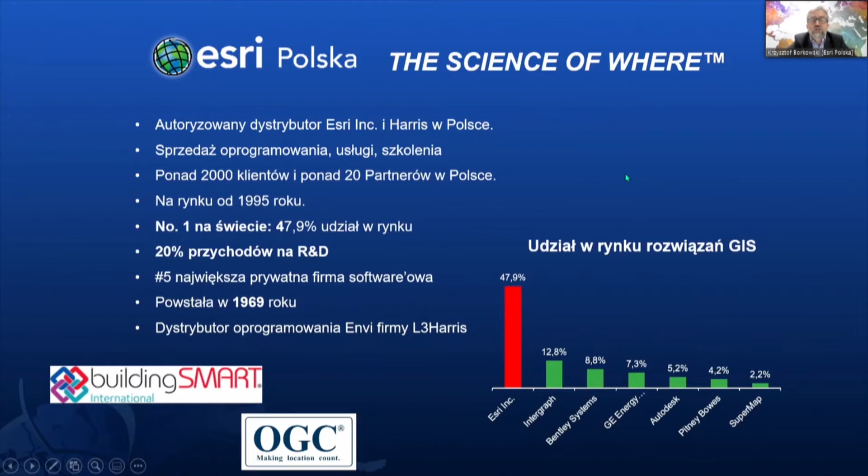Our software has also been used for creating Oscar-winning films. And we also purchased SiteScan, which deals with imaging from drones and creates 3D models from their imaging data.

Regarding the market situation, future customers who are related to some spatial aspects, like resources and data, if they work with us, they need tools to keep control of their processes.

So here are the main organizations working with us, and of course we cooperate with the transport industry. I believe 98% of large infrastructure companies are using solely, or to a significant degree, our software.

These are big customers, and we are present among many companies. There are a lot of GIS experts preparing spatial data and information as a sub-element of their processes using our tools.

Let me also tell you what is the origin of the fact that these companies have been using our software so extensively, and what kind of changes we have experienced.

The majority of our organizations, and also many of your organizations, are some kind of silo, where processes, departments or tasks are carried out as an element of some areas, and information exchange is small, with quite a lot of gates. At some point, you start considering which gate is best and where to find the best information. Many organizations have observed that the approach can be different.

So the question is, what would happen if we were able to break down all those barriers for the projects which generate negative value? They generate a lot of problems and extra costs downstream. So if we break the barriers and optimize the processes, concentrating on the true design problems...

This will allow us to create operational cooperation and information exchange among all stakeholders, including the customers. If all tasks are concentrated on something available in space, changing the silo operation model to a geocentric model, concentrating on the elements, definitely puts more order into processes, and information available in the organization becomes well structured.

So in the design industry, if spatial information is collected at the first stage, if we create some kind of full database originally, this will reveal a number of threats or situations which, if discovered at later stages, would require design changes and significantly increase the cost of projects.

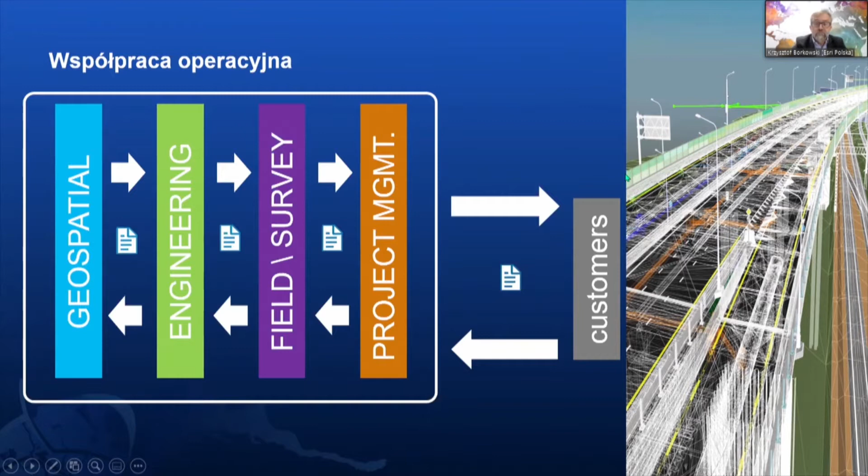So what is our perspective from the GIS and BIM point of view? Generally, we believe that GIS and BIM are strongly interrelated. These processes can exist independently, but they will never be complete if so, and risks will appear due to missing spatial information, as well as missing information in a broader spatial context, like more distant objects and facilities.

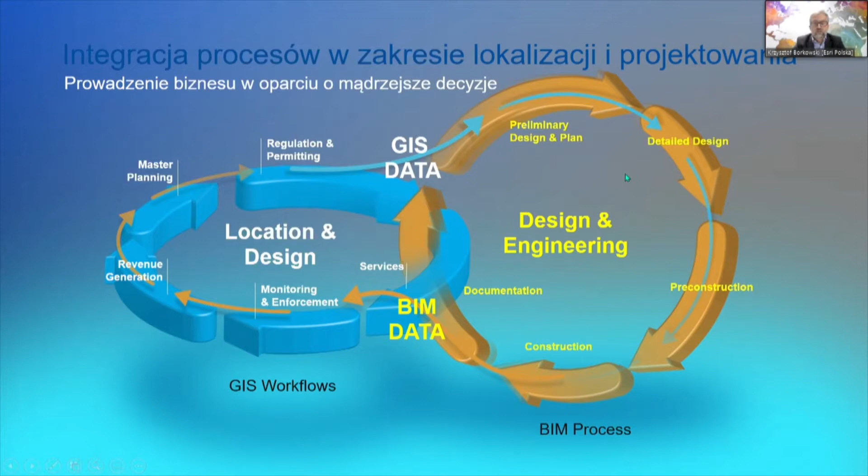So changing the project life cycle will allow us to understand the full data flow between design, construction, maintenance, and operation of infrastructure.

As an example of the first process, these are like permit and planning. Our system gathers and makes available BIM, CAD, MAC, PDF, Excel, surveys, and all types of data which are necessary and help design. Before the analysis, a lot of sources of information need to be gathered. So our tools, like for feasibility studies, will allow you to better understand the data, and this will allow you to carry out different analysis.

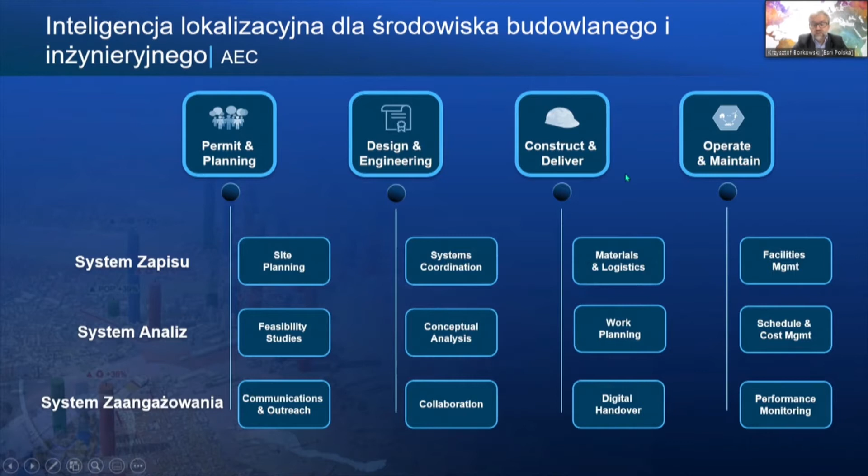And finally, with tools like StoryMap or in-field work or browser work, so the involvement, this will allow transfer of feedback in real time, collecting of feedback. This can also be used in social consultations, public consultations. So that's very important to separate all these areas where this process can be functional.

And looking at the basis, these three milestones, the system of record and the system of engagement, so this is a fundamental element of the system, puts all these elements together. In IT engineering, usually these are separate systems, but our assumption in our software is that it is a single system which generates a lot of synergy to achieve development of the organization.

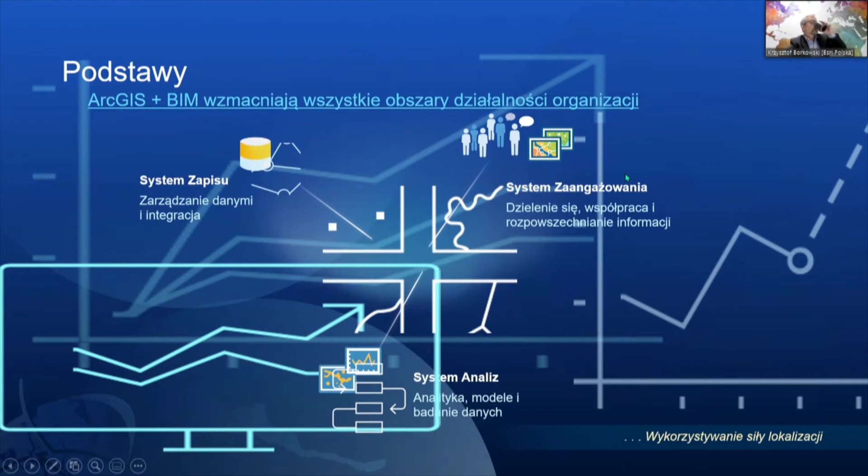So we can use different types of data. The software can organize and visualize all types of data, vector or raster, or literal sketches, calculation sheets. And we put all this data into one single system. So independently of what kind of data you have in our environment, this data can be used to work, and this is not very common.

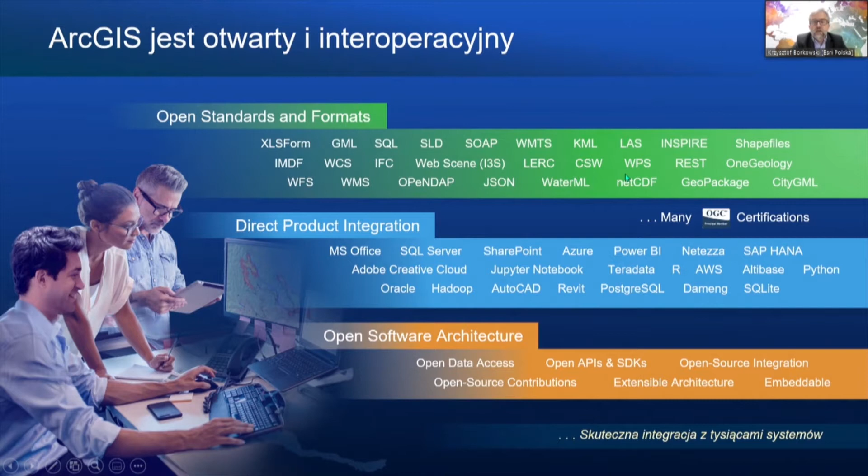Our system is open and integrational, so we support different formats and standards, and we have integration with other software used in business, like Microsoft, SAP, Adobe, API. But we also integrate significantly with Autodesk, and for almost 3 years we have had good cooperation.

And now we create Revit models on websites, and we can use Civil 3D to use spatial data. And also it generates trust of the users, and all the data you will have all the accuracy collection methods. All this information is available to be used and consumed directly in Autodesk software.

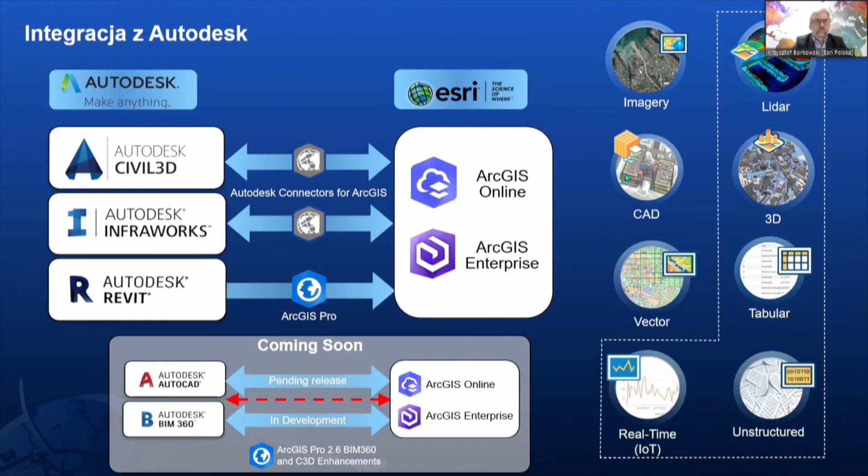And the solution in the market: I have 2 presentations on how the software operates in the UK, where Skanska, Strabag, and Costain carry out the High Speed 2 project, a high-speed train project in the UK. So I have 2 slides on what their perception is of the application of this approach.

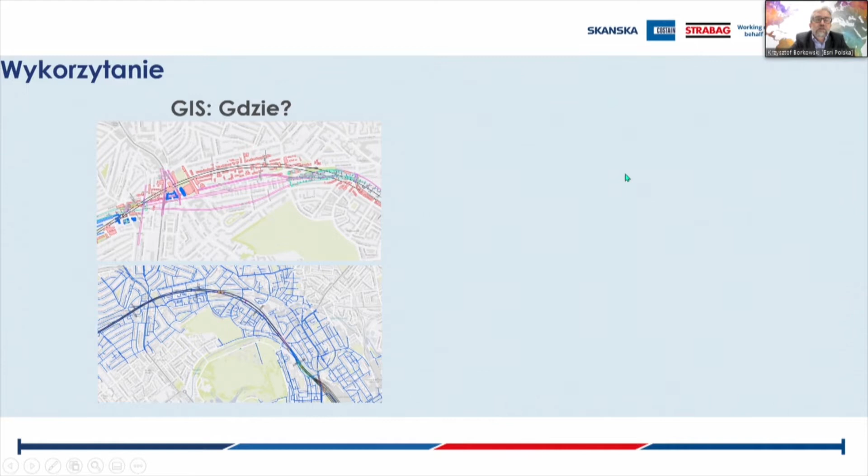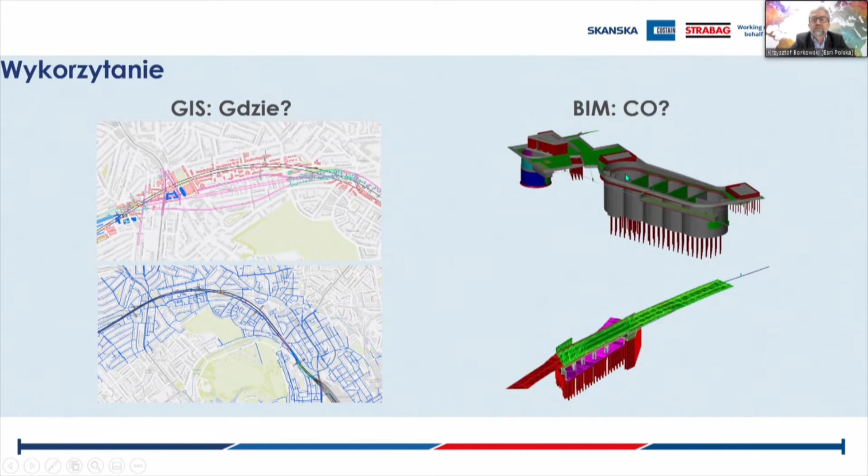First of all, it was clearly defined what spatial or CAD software needs to be used, and GIS is responsible for all information on collecting where, and BIM is responsible for all the information on what needs to be included in individual areas. Together, this is called GeoBIM - a combination of spatial information, which is supported by the structural information on the structures and how things are constructed.

And how was it summarized? The centralized GIS platform, integrated with BIM, totally changes their work. They can take smarter decisions, and it facilitates or speeds up schedules and decreases costs. And what is most important from the sustainable development standpoint, it helps build infrastructure which can last longer, also in terms of smart solutions.

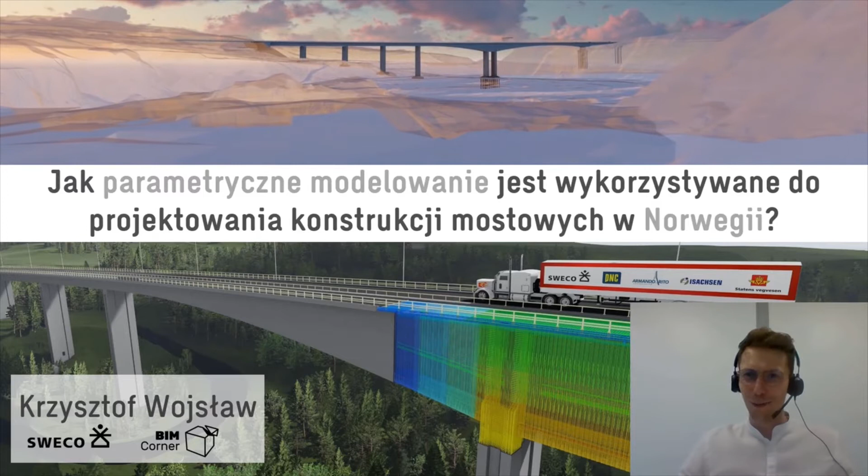Welcome. Good morning, ladies and gentlemen. I hope you can hear me well. The title of my presentation is How Parametrical Modeling is Used for Designing Bridge Structures in Norway. However, events from recent weeks made me change this title.

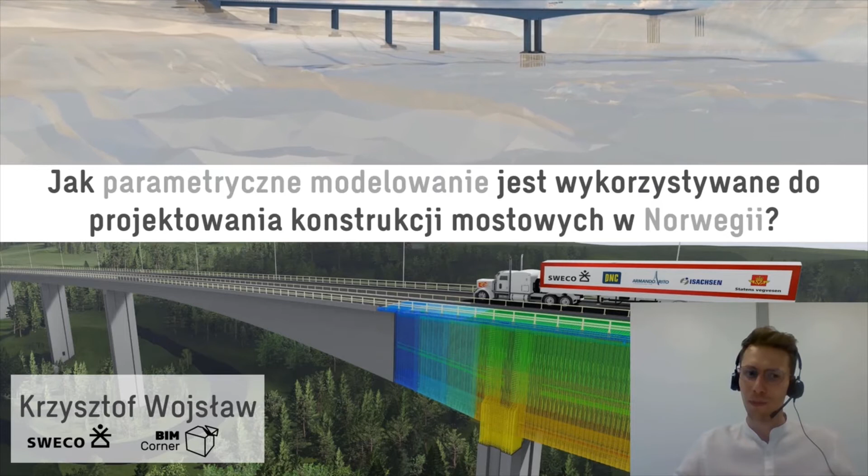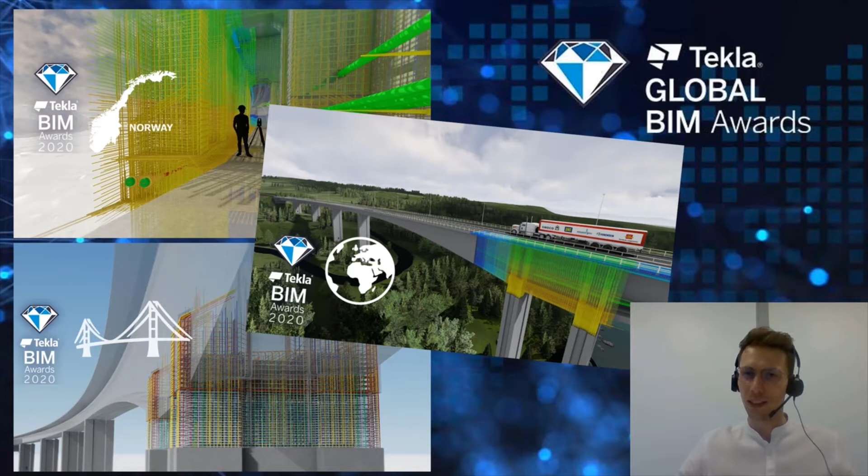It means how parametrical modeling leads to winning the prize for the best BIM project. The project I had the pleasure working on for the last 2 years won Tekla Global BIM Awards, a prestigious award, and not only one, but 3 awards: for the best BIM project in Norway, for the best infrastructural project worldwide, and the prize for the whole lot, the best BIM project worldwide, from among 130 projects filed from 30 countries.

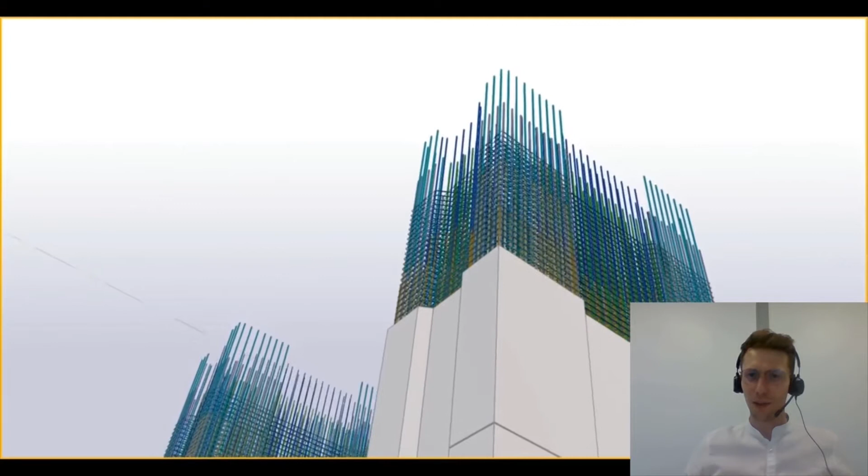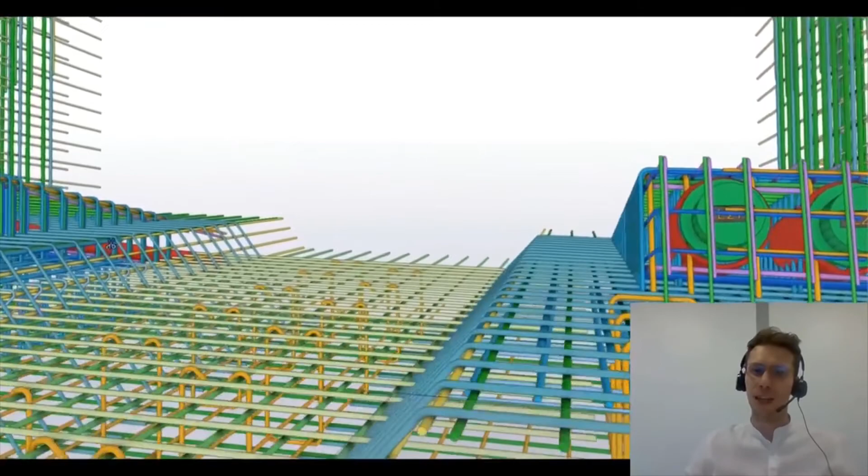And we are talking of this beautiful structure, Randselva Bridge. It's a bridge 634 meters long, and the longest span is 230 meters. Randselva Bridge is 100 kilometers from Oslo, and it will be built without drawings. Of course, for designing, sketches and drawings were made, but at site only the model was used, with literally a few detailed drawings of elements like a detail of drainage pit or a detail of membrane, which is very hard to be modeled, so it's much easier to present in the form of a drawing.

Contractor out of the model generates all material lists, tension cables, and trenches, all that comes from the model.

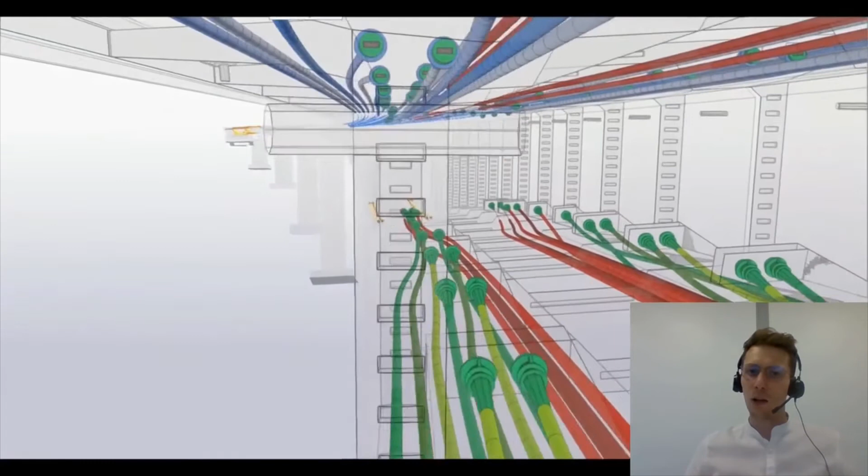In this case, it was a design and build contract, which is not an everyday practice in Norway. The main contractor is PNC, which in Poland you may know by the name Porr. The designers are Sweco from Norway and Armando Rito from Portugal.

Please look at how detailed the model is, modeled so as to avoid collisions, to facilitate work and control of collisions at site. The project is completed, and in spring 2022, the bridge is to be handed over for use.

A few words about me. I'm Krzysztof Wojsław. I come from a small but beautiful town of Olecko, in the Warmińsko-Mazurskie region. For 7 years, I have been living and working in Norway. I got my engineering diploma at Gdańsk University of Technology, specializing in bridges and tunnels. My master's thesis was written in Trondheim, Norway, together with the Norwegian General Directorate.

This year, I gained a virtual design and construction certificate at Stanford University in the US. For over 4 years, I've been at Sweco in Oslo as a bridge designer, and I mainly coordinate international projects and implement new methods of designing, such as parametrical modeling or the VDC method, which is a method of running multi-sectoral projects.

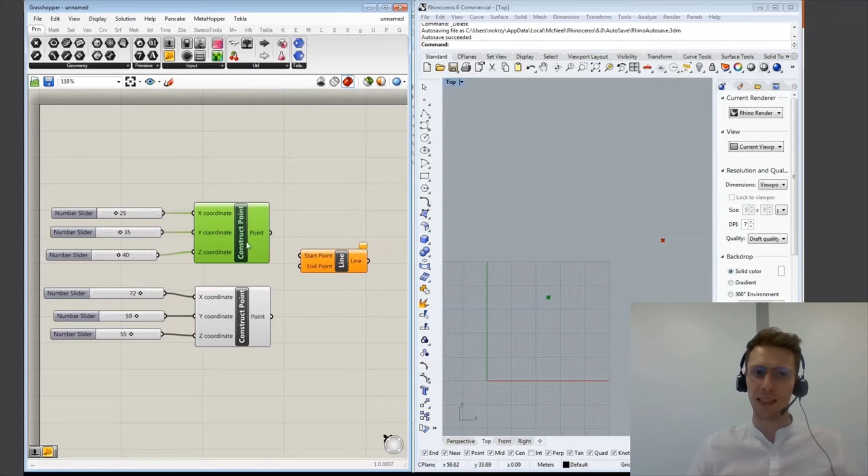When I say this, I mean thanks to creating scripts and algorithms. Let me show you how an ordinary line is created. On the left-hand side, we have software for writing scripts, which will create 2 points placed in space. These points have been connected with a line, and so we created a parametrical model of our line.

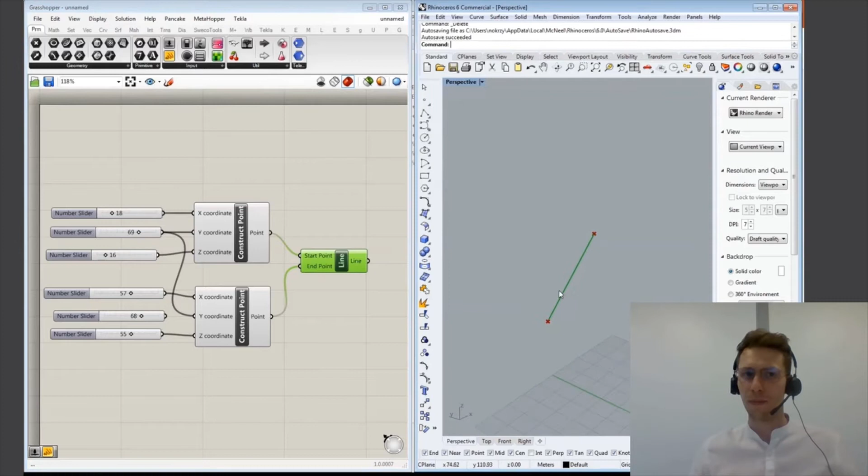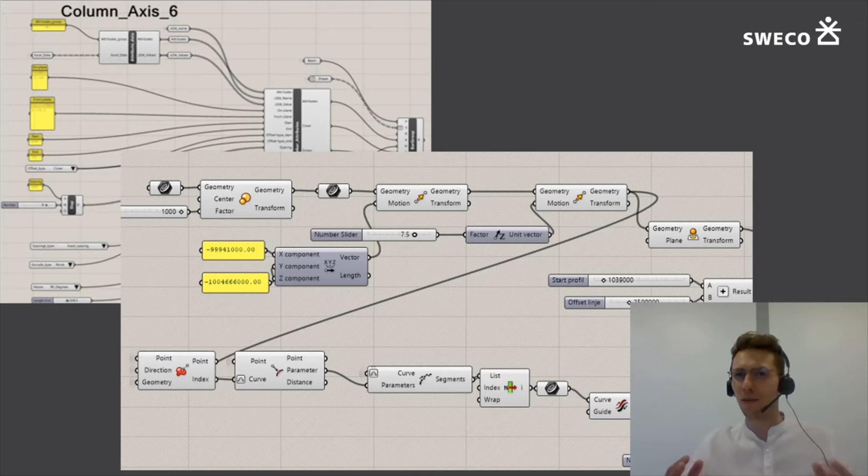The points need information regarding their position, that means their XYZ coordinates, and thus we can create a relationship between points and move this line. This line can be exported to a different program, a calculation program, or one for creating a model as a beam or a column. This way, further relations are created. So from one line, we can create relationships between other lines, other objects, and actually we can create our whole bridge unit.

Okay, that was the definition. So parametric modeling, summarizing, means creating scripts and algorithms which describe our geometry. Okay, and now why should we be using parametric modeling? What are the benefits of it?

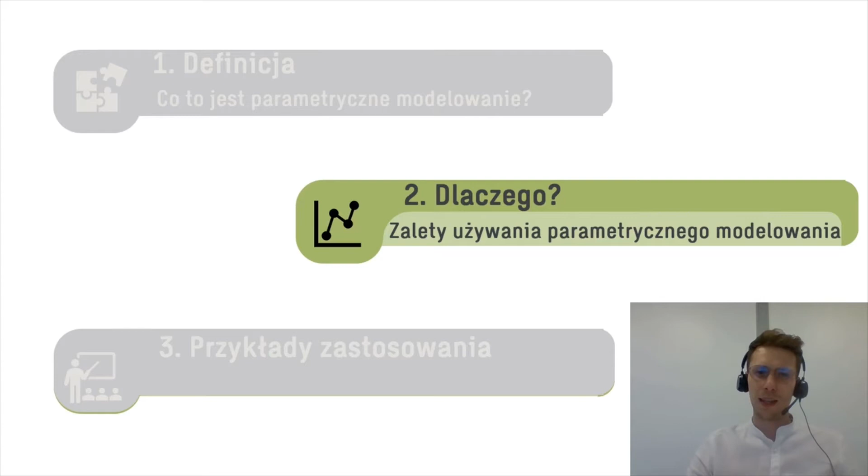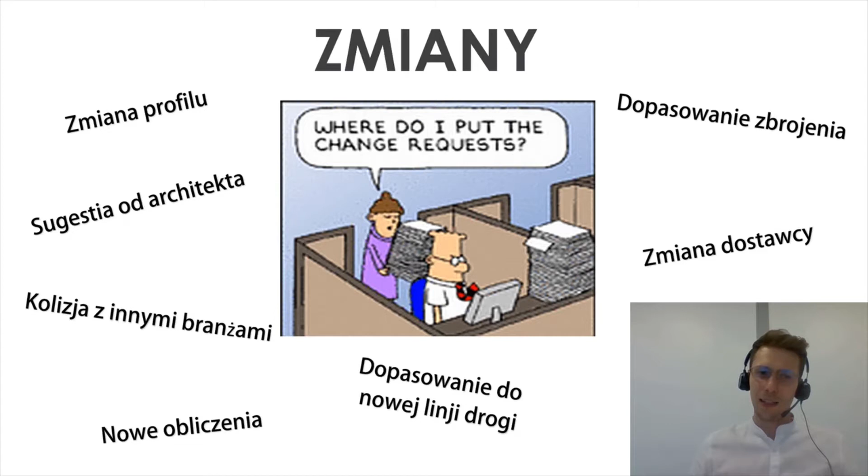One of the best benefits is the ease to adapt to changes. Here we can see a few standard changes for a designer, like adjusting reinforcement or suggestions of an architect which can really destroy our project. After 7 years working as a designer, I found one name describing them all: nightmare. It's a nightmare which can really destroy all our efforts put into the project.

So what should we do? I always advise here to listen to this gentleman. We should get ready, because changes will come anyway. But don't wait for the changes without any action from you.

If there is some risk that the road will change, let's put a lot of parameters into the geometry of the road so that each and every change can easily be adjusted and adapted. So we are looking for risky parameters which can be modified, and thus we create our parametric model, because it is not a masterpiece to create the whole model of a bridge where each and every element will be moving. We have to estimate what is actually the greatest risk and build our script and relations following that.

The next strong aspect of parametric modeling is the fact of merging it by idea with other programs. In this case, I actually work on two programs, Rhino and Grasshopper, which let me create scripts. But they can also be other programs like Revit, Dynamo, FEM, or generative components. It doesn't matter here. The whole idea is that our parametric model can be sent to calculation programs like Robot, SOFiSTiK, or RM Bridge, but also to programs creating geometry like Tekla, ArchiCAD, Revit, or NovaPoint.

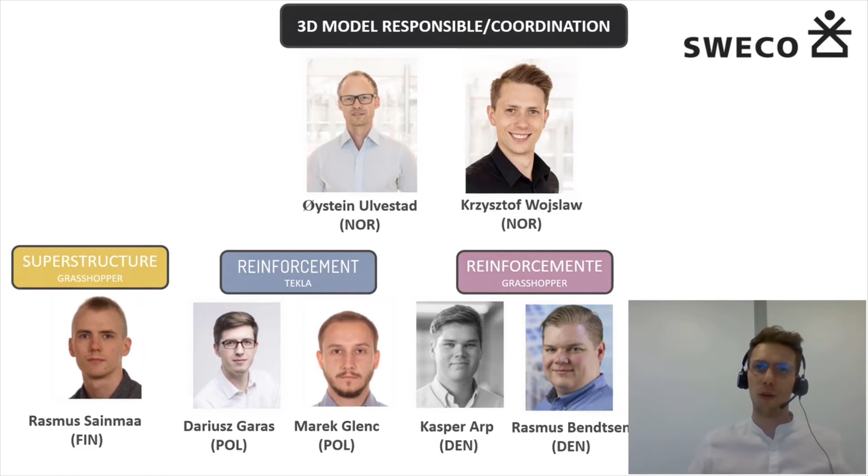The benefit of projects based only on a model is that in every country, a 3D model will look really similar. My experience shows that in cooperation on international projects, standards according to drawings look different in every country - it's different in Germany, Poland, Norway, or Finland. Here, creating a 3D model, it will be very much a standard one, and everybody working on the bridge does not have to know the standards to such an extent in creating drawings or models as it had been with drawings or cross-sections.

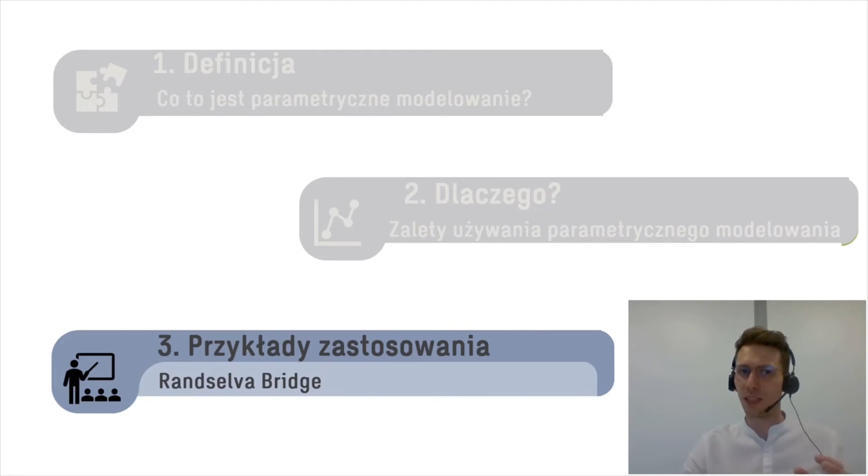So what we have discussed is the definition, what parametrical modeling is - writing our scripts, describing geometry. We have specified the benefits, why it is worthwhile: adaptation to changes, because we can be working with a variety of programs, and there is easier cooperation between or among other various offices. Now let's go to the examples to show you practical application of parametric modeling.

It was 4 years ago, and it was a two-span bridge, 40 meters long. But following the development of methodology and methods of designing, like parametric modeling, the goal - the largest bridge worldwide, built only on 3D modeling basis - has become ready for implementation. It appears that the crocodile is not so scary as it's presented. It's possible. Let's move on to examples.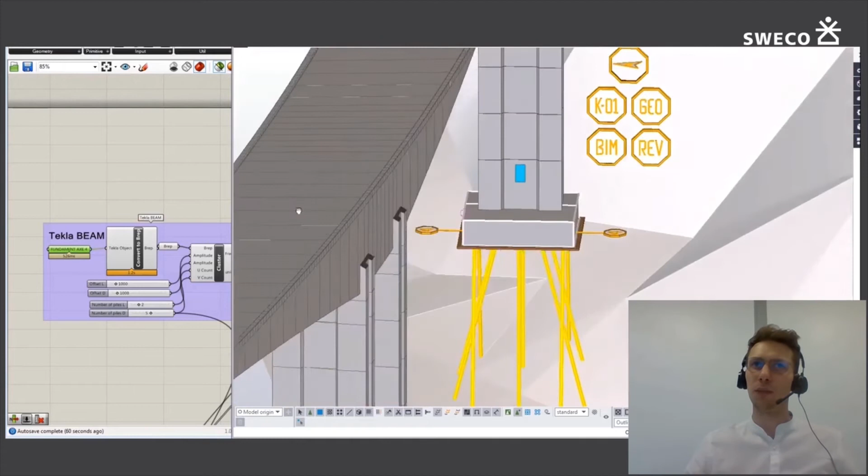Out of the parametric program, we select foundation for which the geometry of piling has to be created. On the monitor, we can see the gray surface depicting the surface of the rock. Using sliders, we can easily define the number of piles in the given foundation and the span between and among them. We can also see that the length of each pile will be adjusted to the surface of the rock.

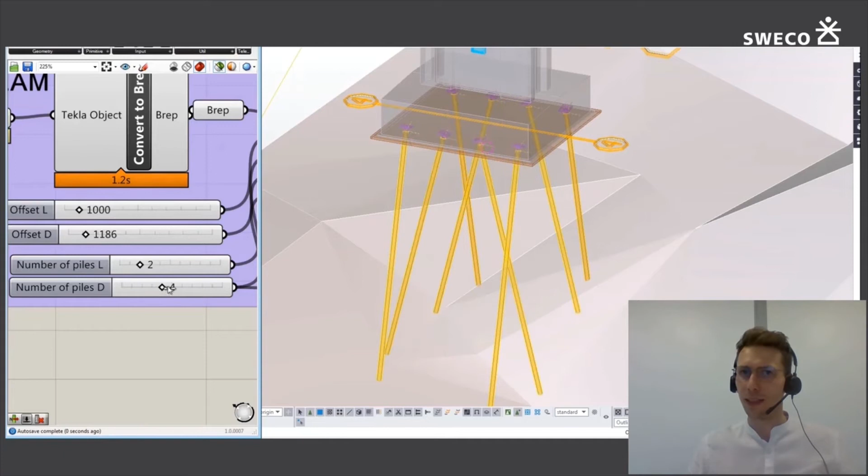Thus, we can quite easily estimate, together with the contractor, the cost of the investment project and see how the costs are changing. If we click on a given pile, we can check precise information on the length of the pile, and when we change it, it will be updated.

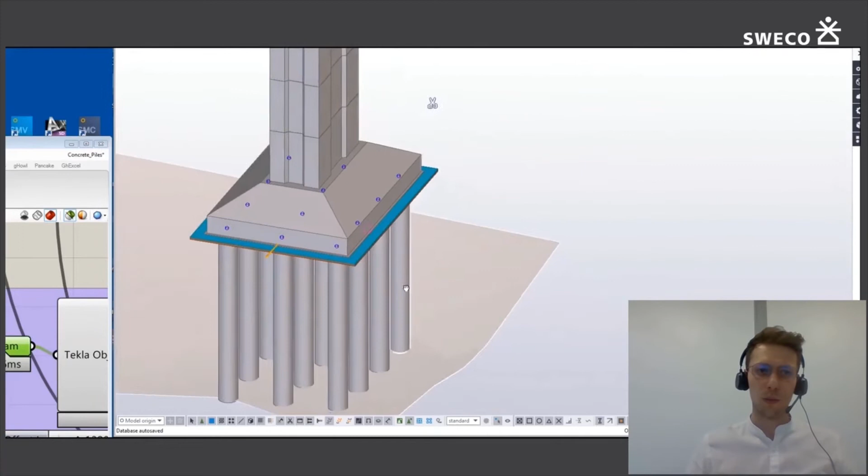The next example depicts the same rule, but for creation of concrete piling. And in this way, we standardized our system of work. Each and every time we create our model, we can quite easily introduce our parameters: the number of concrete piles, and the span distance among them.

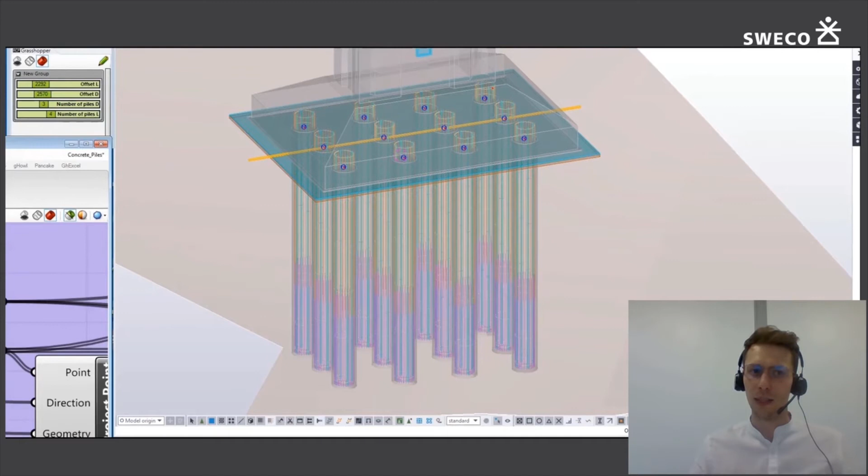Additionally, following the concrete piles, we went further in designing our reinforcement so that it will be created following every modification. So if we change the number of piles in this foundation, we'll see that the reinforcement is generated anew. We are changing the number, and automatically the reinforcement is generated using some options. We can also modify the length of the rebar, the anchoring, or the cross-section of rebars. So this was the first example.

The next example will be creating a box reinforcement in the whole part of the support. Believe it or not, only one person was responsible for modeling the reinforcement in the support part of the bridge, which, let me remind you, has a span of 200 meters. Only one person was modeling this reinforcement. Now let me show you how it was possible.

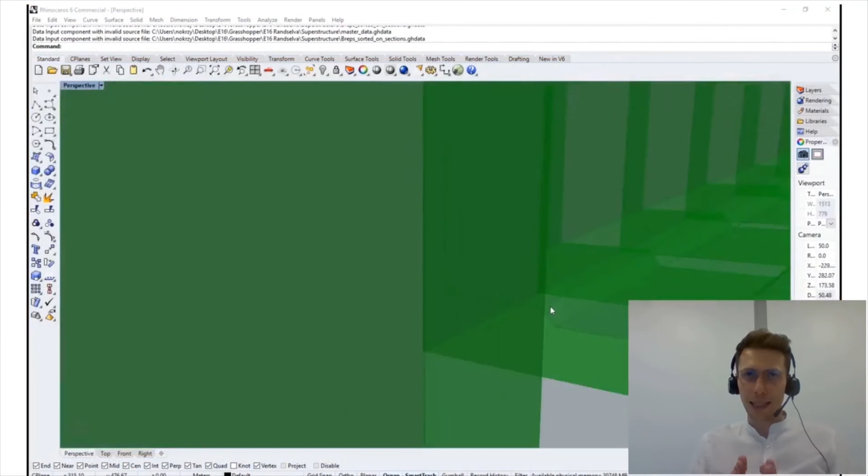Here we can see our support parts, elements which are mirror reflections, so on the left and right-hand side, elements will be identical. The rule is that we had to find our lines and points on our bottom box, and in this case, we want to find the picture of the stirrup.

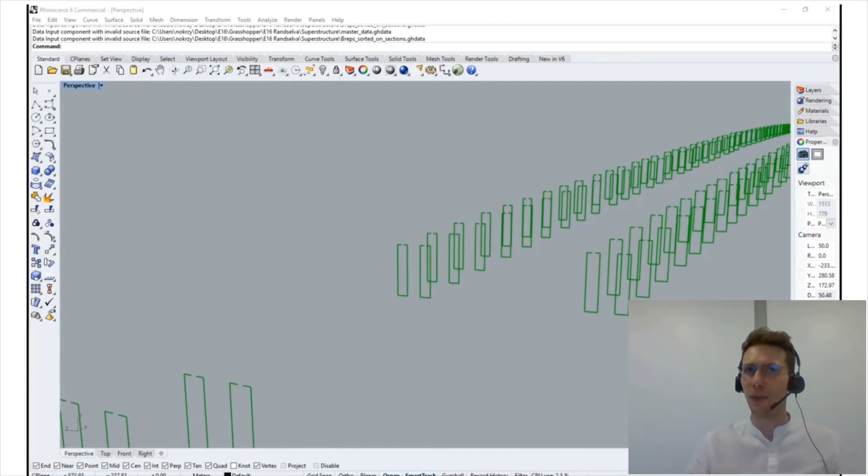Every stirrup in the box will be different because the thickness of our lower board is defined by two parabolas. So the height of our stirrups will be changing, but the software can find the appropriate lengths by itself and connect the reinforcement into one element so that it will be easier to order at the site.

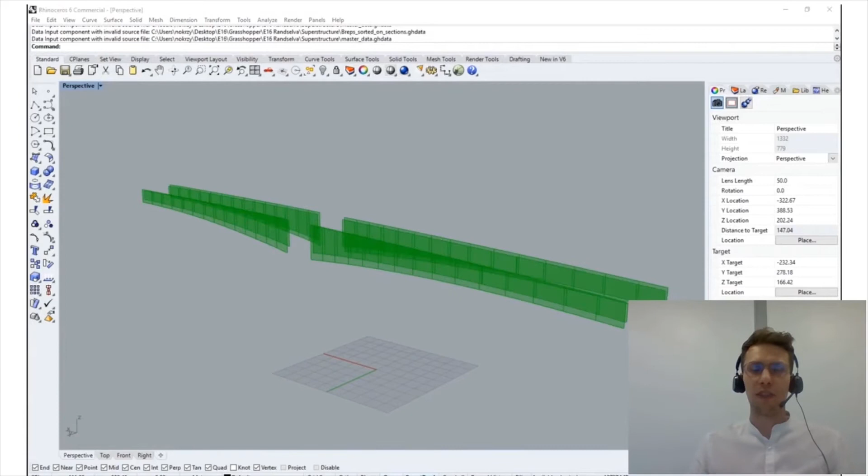So let's see the solution to this problem looking at a different example. Here we are looking for auxiliary reinforcement in the walls. Identically, we find our walls and appropriate points at appropriate heights, and the software creates the stirrups by itself, which will be in the appropriate quality, in the appropriate element.

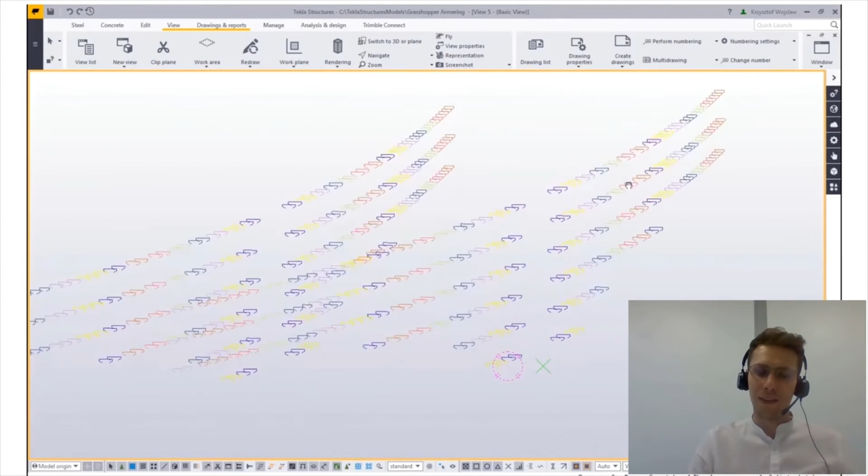Every box will be different, and thus on the right-hand side we have 25 boxes, and on the left-hand side 25 as well. This is how our reinforcement is created. So, this is showing how we created the majority of reinforcement on the bridge.

Now let's go to tension cables and electrical cables. Tension cables were calculated in RM Bridge, and using a script we could export them to our model. In this case, we had assurance that what had been calculated is also present in the model.

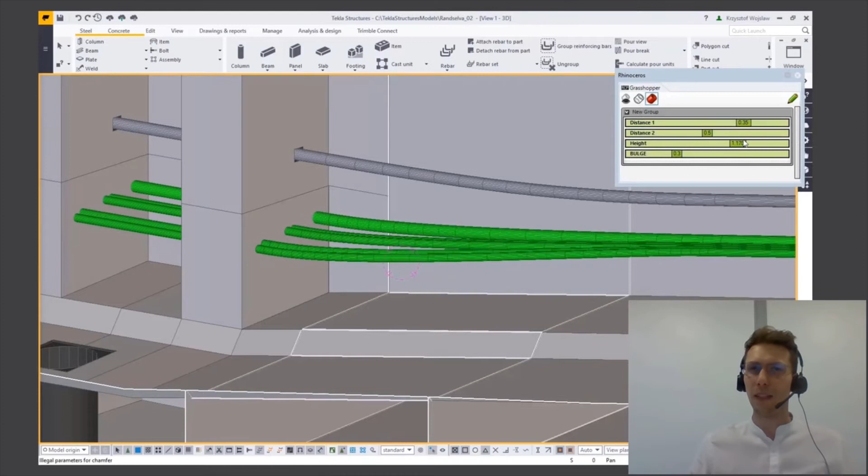In the software, we can define the distance between our cables and also the height at which they run. In this case, these are electrical pipes going all through the length of the bridge and must be adapted to our parabola. We can easily change the span between cables in order to adjust their position in relation to reinforcement. And so our geometry of cables had been fitted to the whole parabola.

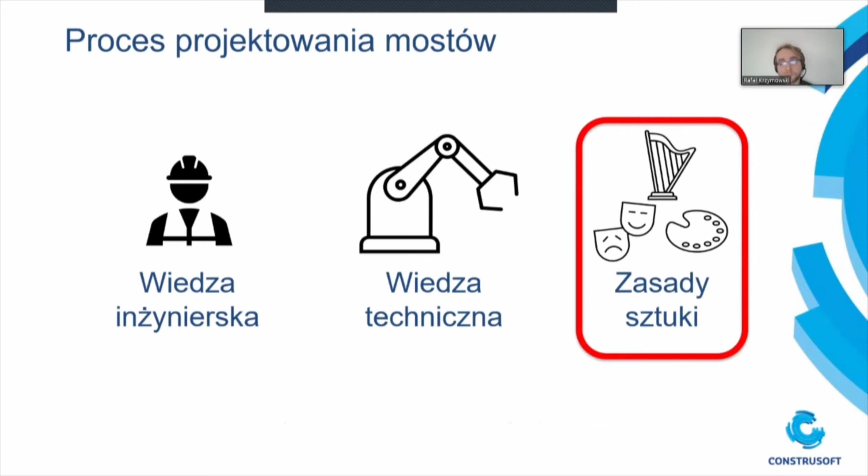Moving on to the subject matter, we all know that many people participate in designing bridges, representing various sectors: designers, process engineers, as well as architects, who play an increasingly important role. The designing process itself should be based on engineering knowledge, technical knowledge, and the rules of art. Regarding knowledge from that last field, this leads us to the term of aesthetics in the bridge designing process.

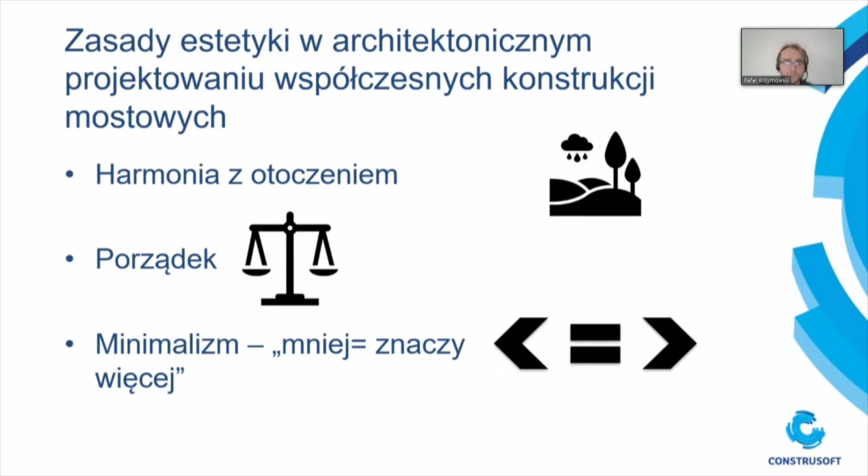Regarding basic rules which one should treat as guidelines: first, harmony with environment, meaning the designed units should play together with the landscape around them. Then, order - you should aim at keeping order in elements and taking care of cohesion of elements, and also balance between rational elements and architectural expression. As well as minimalism - minimum variety of forms should be a guideline.

You can draw conclusions from this, taking into account all three rules specified. Designers should aim at obtaining unique forms of structure which will give the objects a specific, unique character. One should also aim at maintaining slimness of structure and avoiding the impression of heaviness.

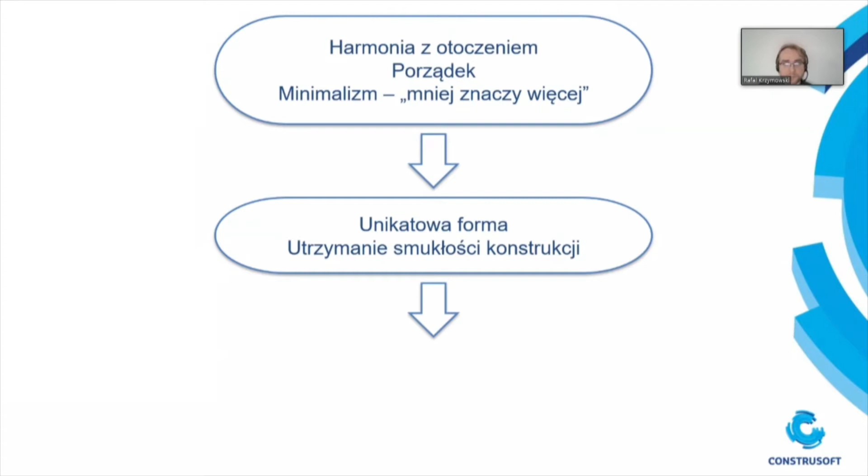This often leads to applying unconventional, irregular shapes, meaning complex geometry of the unit, whereas modeling or creating such objects is quite difficult. It generates a whole range of challenges and problems, among these: a curved axis of a bridge, variable cross-section along its length, longitudinal decline, variable decline in cross-section, and also variable support or modeling construction lifting.

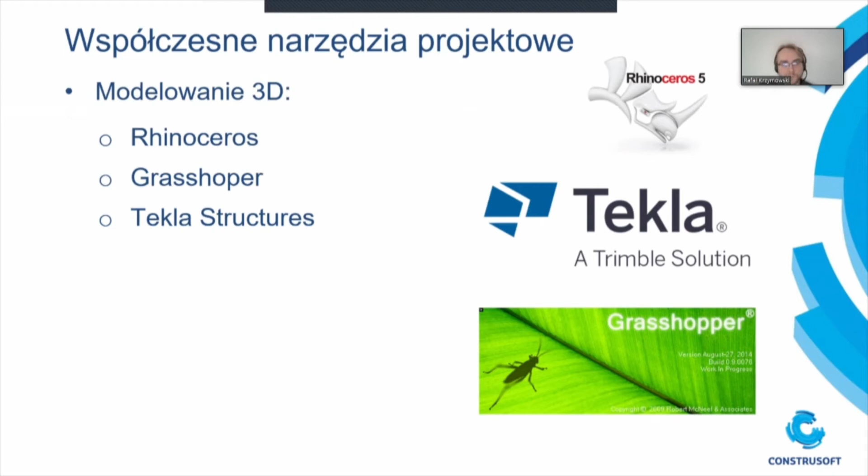Fortunately, following the development of technology and computer techniques, more and more advanced tools are available now. My predecessor talked partly about 3D modeling. We have examples like Rhinoceros, Grasshopper, and Tekla Structures - programs which can cooperate. What I would like to tell you about also includes laser scanning; an example here may be Trimble RealWorks.

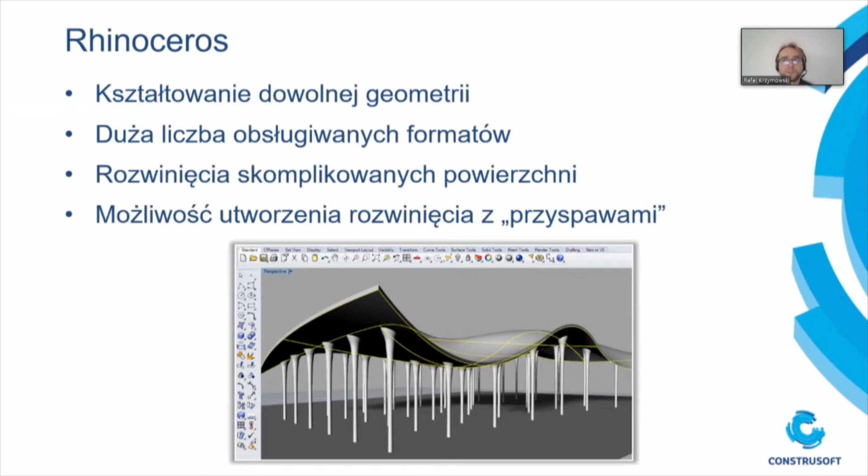Rhinoceros is software for modeling. Here we can practically model any shapes regarding any geometry, and the benefit is also the great number of formats supported, which allows exchange of data with numerous other types of software or solutions available in the market. Grasshopper, on the other hand, is a graphic programming language which can also be used for parametric design, and it is an environment which works with the use of Rhinoceros 3D.

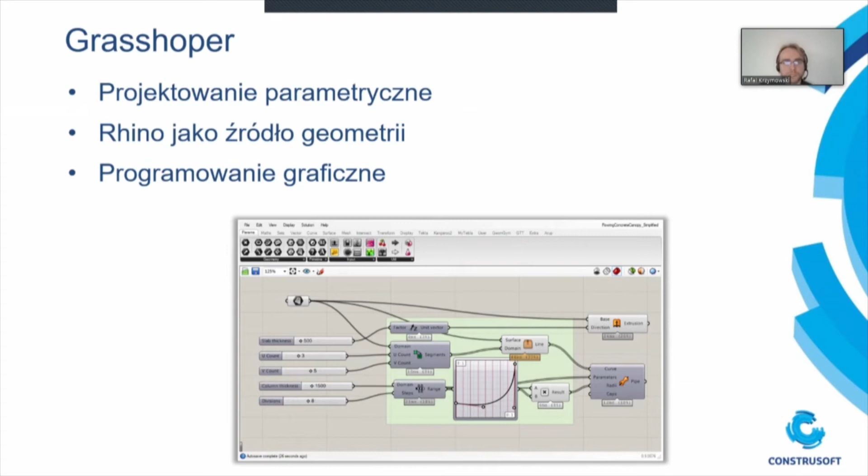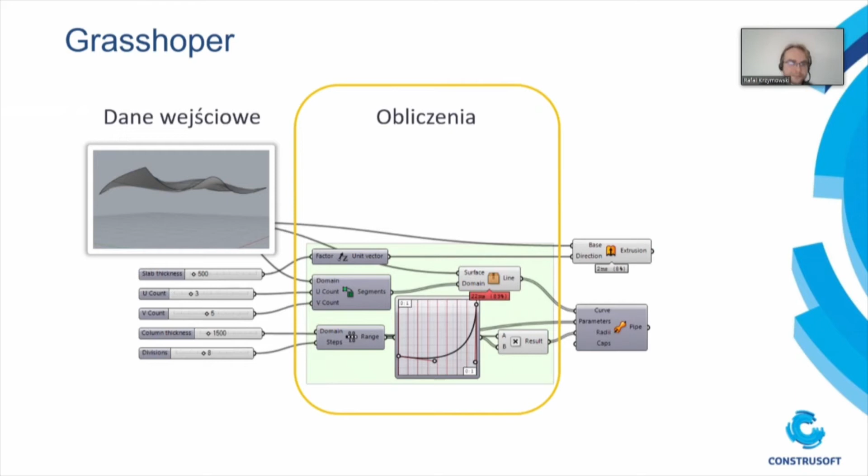This graphic software, briefly, works on the basis that we take a component into the sheet, and then these components are connected to the inlets of further components, and thus we obtain, for example, a complex geometry. Here, roughly, a situation like this: we have input data regarding, for example, thickness of elements, the curve itself, what the span is, and then we connect it with some algorithms. Calculation follows, and as a result we obtain a model with complex geometry.

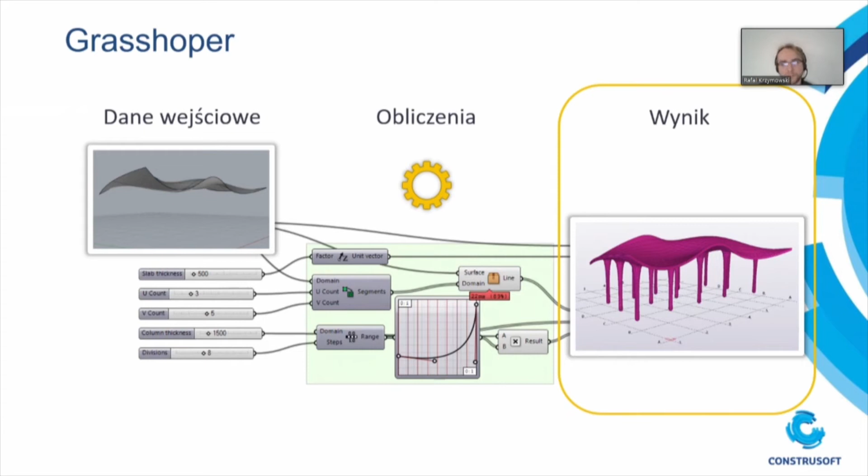This may also be used for generating a variety of elements or for connection to other programs. Benefits of Grasshopper: we can create our own parameterized sheets for typical structures, and we can optimize designing time for typical elements. This can also be used for creating or modeling complex spatial structures.

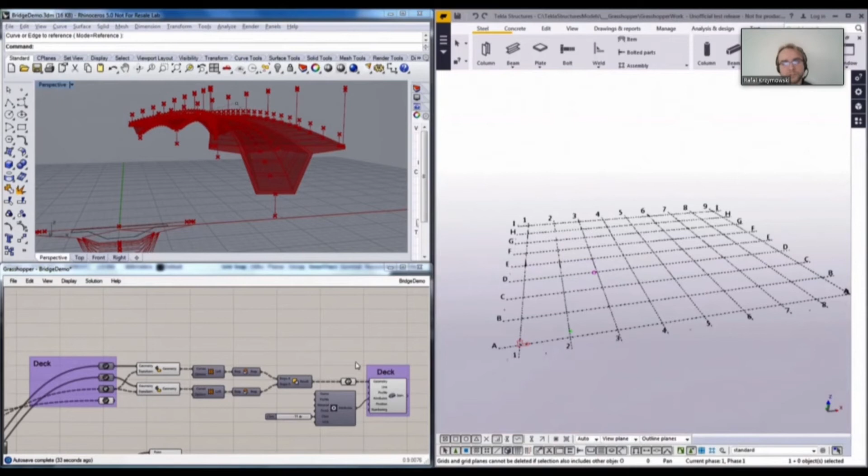It also allows modeling or creating similar elements simultaneously. Here, very briefly, what it looks like - a brief animation. We have three programs: Rhino, Grasshopper applications, and in Rhino we have various cross-sections defined, a defined path or line of this unit, and by connecting and merging this data, we can transfer such design to Tekla Structures.

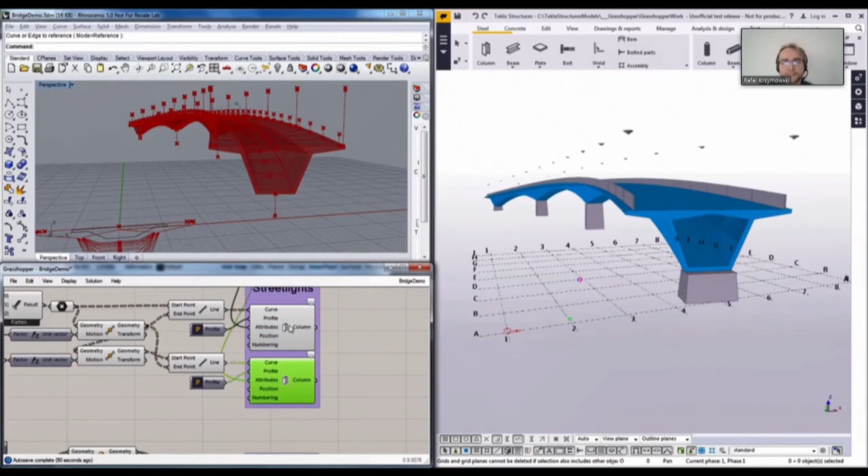The result here will be this kind of geometry in line with parameters specified in Grasshopper. The next film can show you, like in the first one, that you can actually attach it to modeling linear elements, but also more point-type elements or supporting elements, columns or barriers, elements of lighting - the whole range of various applications can be found here.

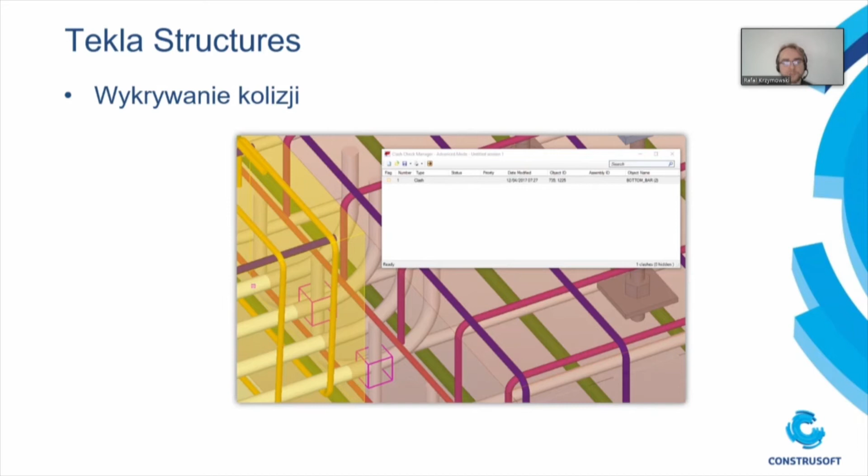Tekla Structures software is an engineering program used not only for design. It is used for designing structure, but as a tool for engineers. It is not only for modeling elements, but it also has a whole series of functionalities allowing you to manage documentation or control the unit.

Here you can detect collision, or check whether certain elements are not in collision, because the model is connected to documentation. We have drawings always up to date, and in the drawings you can automatically generate individual elements, and it also enables you to trace changes as well as quickly respond to those changes.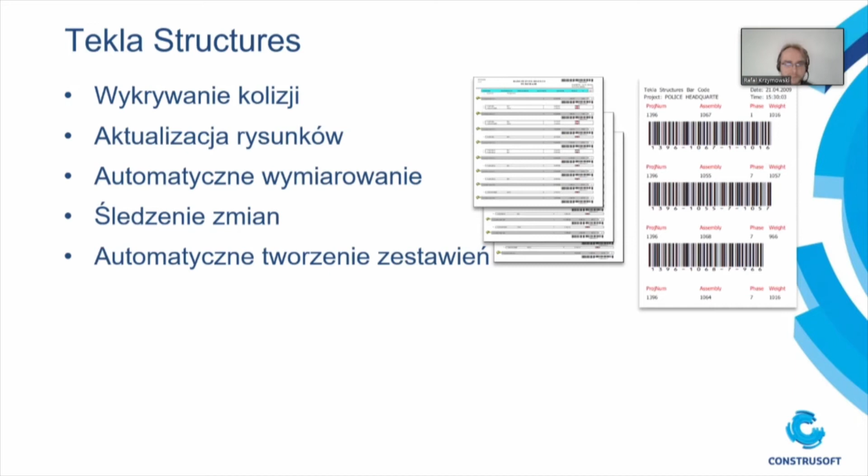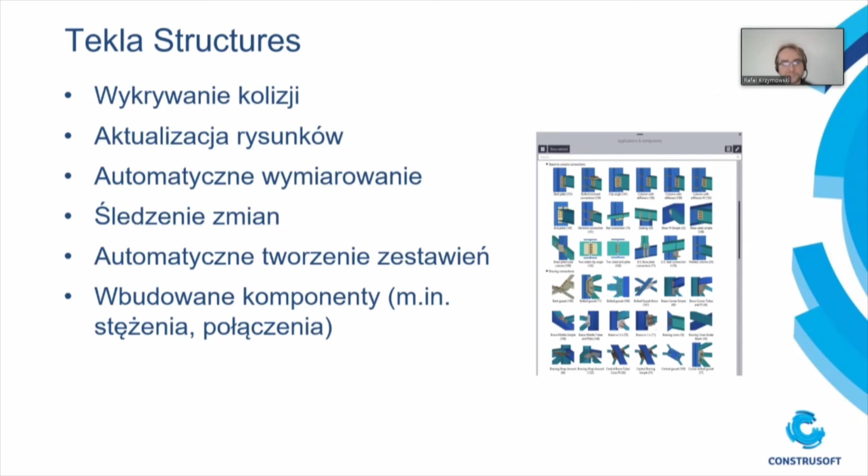Out of the program, we can also obtain a variety of reports, so we can do pre-measurement based on the existing model, whereas the whole series of documents, macro documents, allows you to faster design the structure or introduce reinforcement. Or there is a possibility to connect to production.

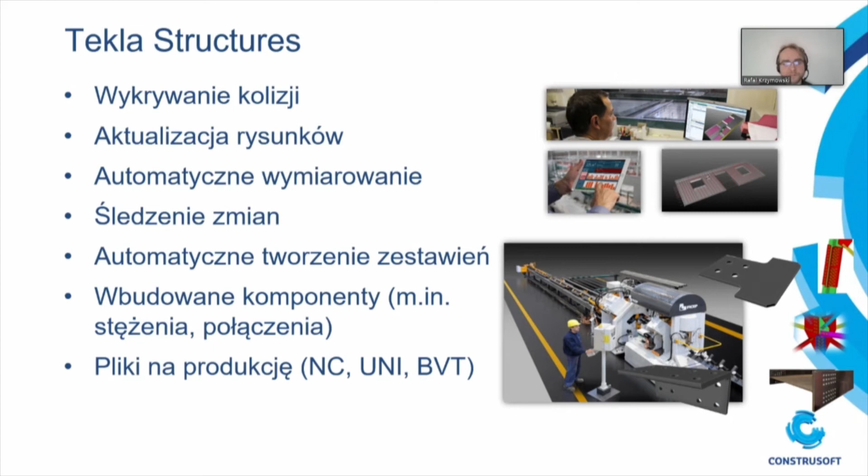You can send NC files to the shop floor, also Unitechnic files in case of reinforced concrete elements, or information related only to the reinforcement itself. Added value here.

Some of our customers may actually stick out in the market, providing additional value and a marketing element. Tekla Structures, on the occasion of more complex elements of structure, is a tool for supporting and facilitating construction of elements.

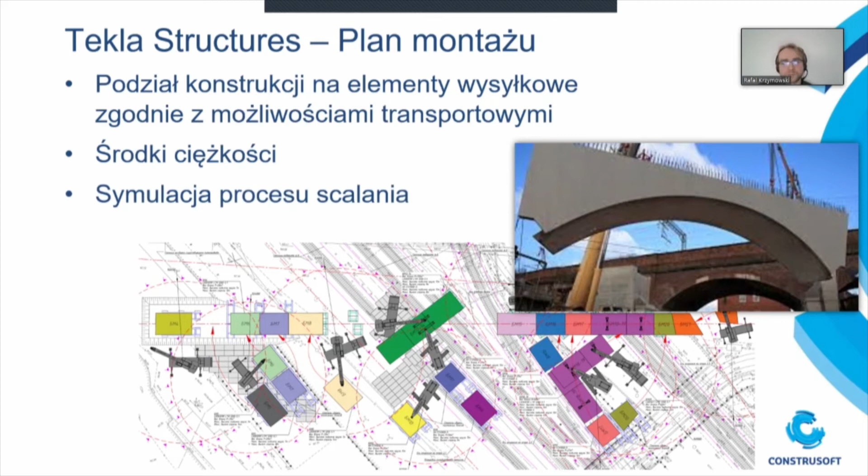We can divide the structure into transport elements and coordinate it with transport possibilities or at the shop floor, and we can also simulate the process of putting the structure together.

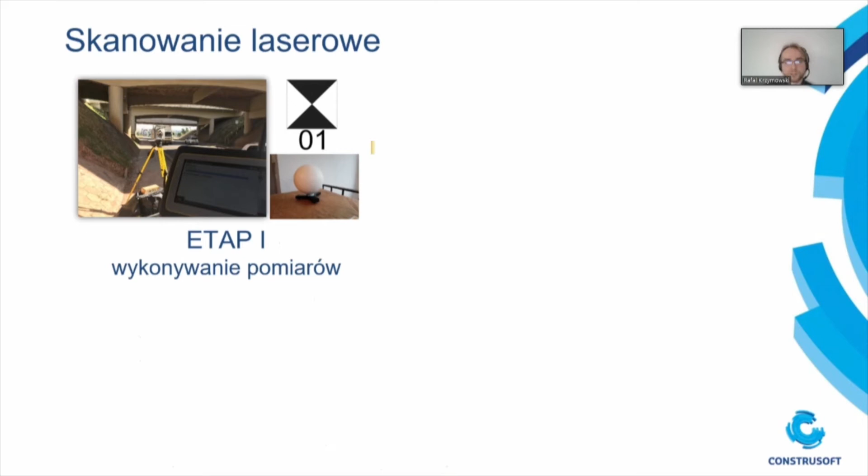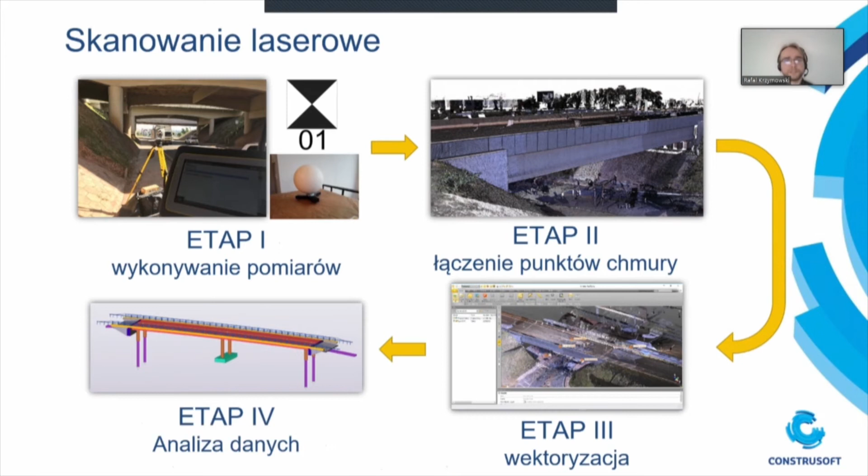Yet another possibility to use these new tools is laser scanning. Let me briefly say it comprises 4 stages. First, we take measurements with the use of special shields or balls, and then everything is connected into a cloud of points. Then vectorization follows, and the 4th stage is elaboration and analysis of data.

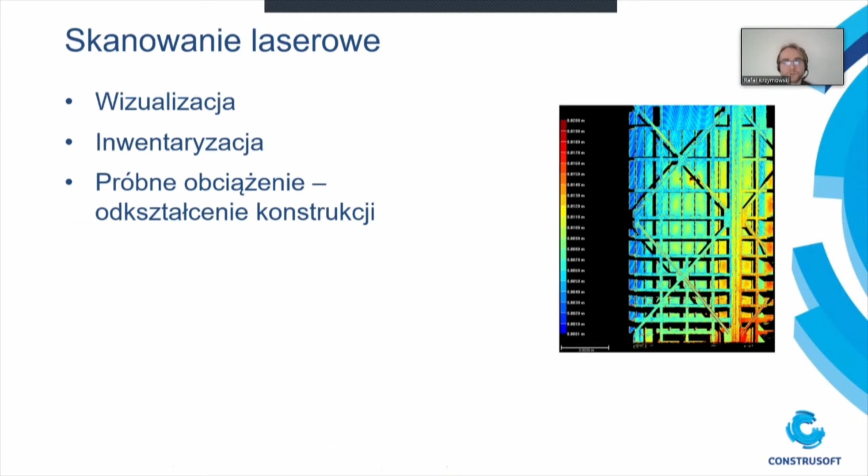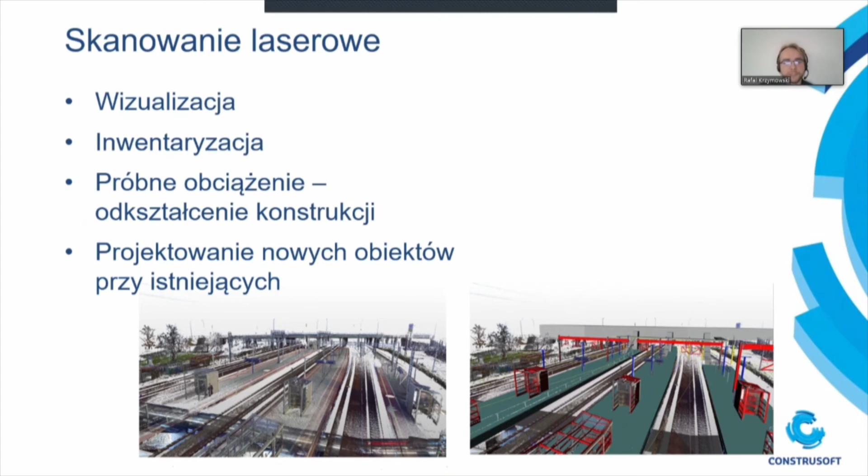Laser scanning can be successfully used, among others, for visualization of elements, inventory of existing bridge units and objects, and also test loading of the structure for tracing or carefully checking the deformations which the structure would have. Also, in designing, you can use it successfully when designing new objects alongside existing ones, using the cloud of points on the existing units to design or intertwine this element precisely. And of course, creating land maps.

An example of application for all these tools is a pedestrian bridge over the Gizycki canal. It was designed in 3D BIM technology, and apart from 3D designing, laser scanning was used in order to measure the displacement in load tests.

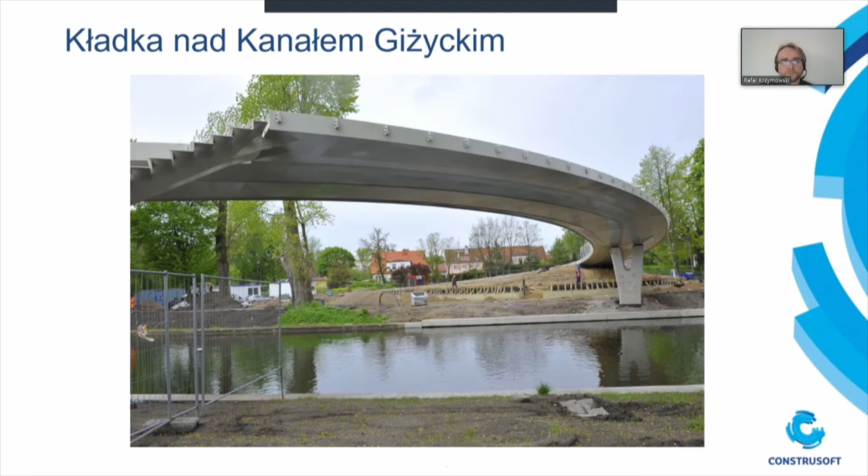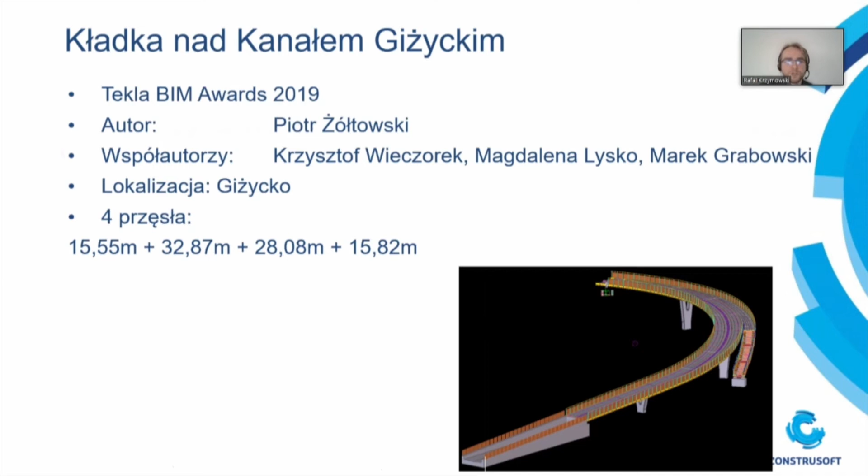It was made by a team led by Piotr Żółtowski. It is located in Giżycko, whereas the challenge was to design a bridge both for handicapped people and for cyclists, but it was also an addition to the existing landscape, and it had to allow small sailboats or small ships to sail under the main span.

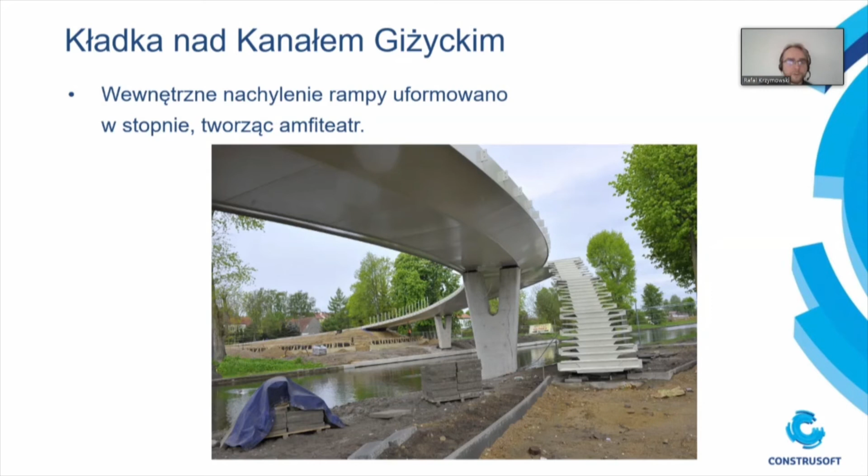Regarding the structure itself, what it looks like - it was designed partly as an amphitheater, a place for the local community to meet and rest. The structure here has a curved axis, and from the east the ramp goes up, then it turns and goes over the canal, and then drops gently down along an arch.

As I mentioned, it had to be adapted for handicapped people and people with limited mobility, and the incline for vehicles is 6% over the canal in that town, Giżycki Canal. In case of an immediate emergency situation, an ambulance can travel on the bridge if the lifted bridge is closed.

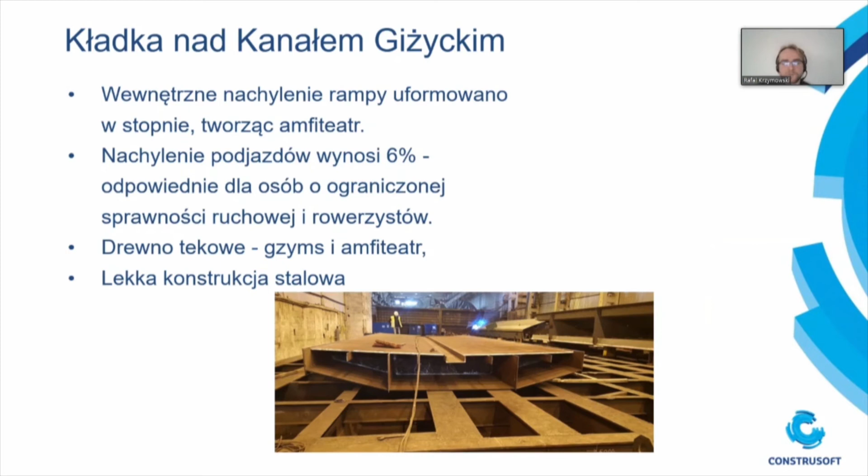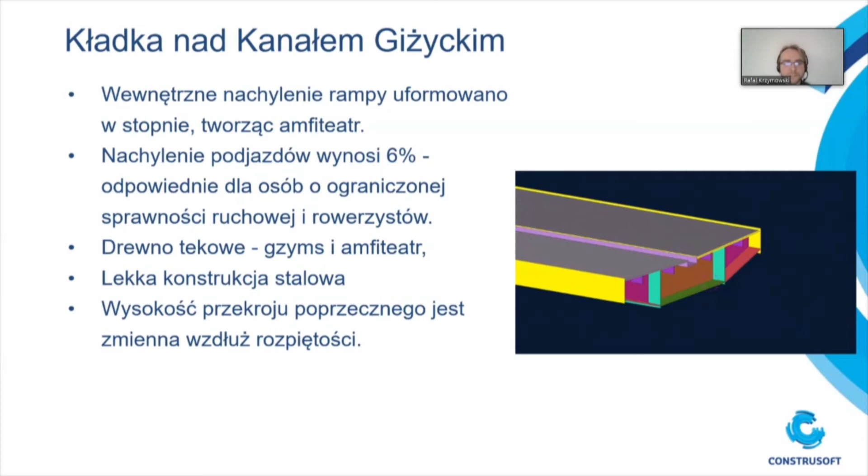Regarding the project, its objective was also to fit into the sailors' tradition of the town. Teak wood was applied here, which is also used for building boats. Light steel structure allows fulfilling the aesthetic requirements at a sensible price, and the variability of cross-section changes along the span, which was aimed to make it still lighter.

This was also done to increase the space under the bridge over the canal for ships to float. Thank you for your kind attention. If you have questions, please don't hesitate to contact me.